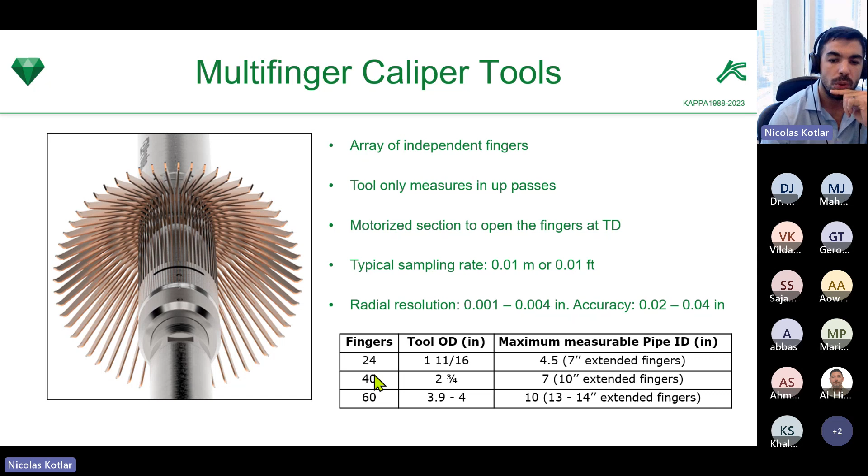The number of fingers has to do mainly with the pipe diameter to be logged. In this case, the example that we will see in this webinar is a 5.5-inch casing, so a 40-finger caliper will be used. Then the finger response itself: what we want to measure are these changes in internal radius, either a hole, a penetration, some metal loss due to corrosion, erosion, or the other way around, deposition.

For that, each finger is connected with an actuator, and this actuator will move in and out of a system of coils, a displacement transducer, and this will allow us, through some surface calibration, to quantify the radius and the radius variation as the tool records the up pass.

So multi-finger caliper is, I would say personally, the star. Let's say it is the bread and butter of the integrity evaluation. And why is that? Remember, compared to other techniques, the multi-finger caliper deals with the first barrier, right? We need to be in touch with the tubing or the casing that we want to analyze.

And this is important because, if you see, there are two studies here. I know that they are a bit old, but this is the published data that I could find. For example, this is from Norway. And if you see all the failures found in Norway, I think these are like 200 wells, something like that, you will see that the main issues occur in the tubing. Right here, you can see the tubing.

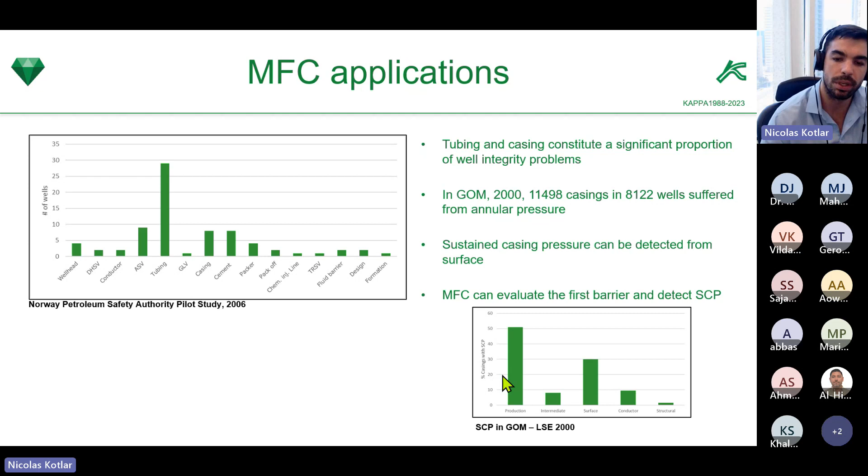So you can imagine that a tool that gets access to that first barrier, either the tubing or the casing, depending on your well completion, will deal with a large percentage of the problems found in wells worldwide. But this is not the only type of problem, leaks that may cause annular pressure. But here you can see the typical problems that could be diagnosed through multi-finger caliper, right?

So in the first case, you can see a tubing that has suffered from corrosion, in this particular case with some fully penetrating holes, right? So definitely, if this is an injector well, the water would not be going to where we expect, or if it's production, of course, this will result in annular pressure, right?

Mechanical failure: in this case, what you see is a casing burst, right? So this is when the hoop stresses are larger than the burst pressure of the casing. Deformation mechanisms: in this case, you can see a 3D image of a helical buckling, right? Compressional stresses or tectonic movements across faults may cause different types of deformation, shear deformation, helical buckling, bends, and so on.

Casing wear, right? Imagine that you set your casing and then re-enter the well to further drill, or for coil tubing or any intervention. The contact forces between the BHA and the drill pipe itself can leave grooves, reducing the mechanical properties of the casing. And also deposition, right? Deposition is another type, calcium carbonate, asphaltenes, and so on. These are all integrity issues that can be diagnosed through multi-finger caliper.

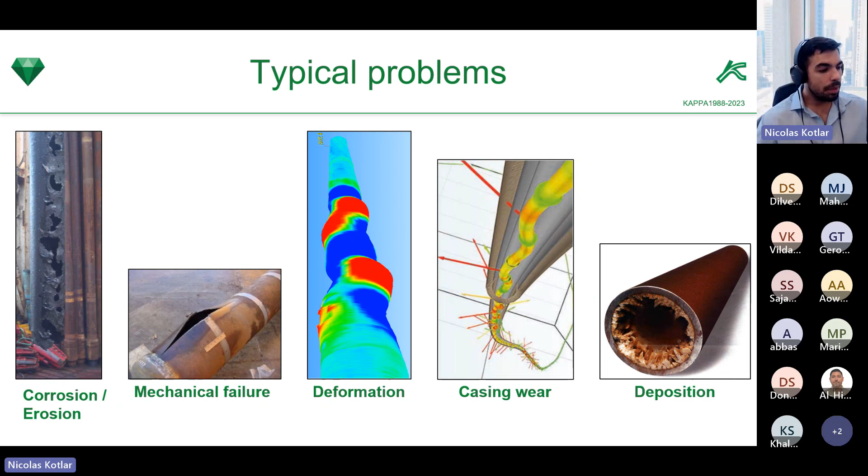So with this quick intro, I will go straight to Emeraude. In Emeraude, we're going to deal with a casing that has a leak, right? And we are going to use two tools to find this leak. So first, we will do it through a multi-finger caliper, and then we will move to the spectral noise data. Before going to spectral noise, I will get back to some theory, right?

So I see someone saying that they cannot see the screen. If you can, please, the rest of you confirm that you can see the screen before I move on, just to avoid any issue. Yeah, for me, I can't see the screen.

Okay. So this is Emeraude. I'm going to start a new file from scratch, and we'll start by creating a survey that I will call MFC main pass, for example. Right? We're going to load some multi-finger caliper data here.

Typically we would like to define as much well information as we have, completion, open hole logs, well diagrams, the more the better, right? But in this case, we're short of time, so let's go straight to load, and we're going to load multi-finger caliper MFC 40. This is an LAS file that typically contains, as you see here, one radius column for each finger, right? And also contains some deviation.

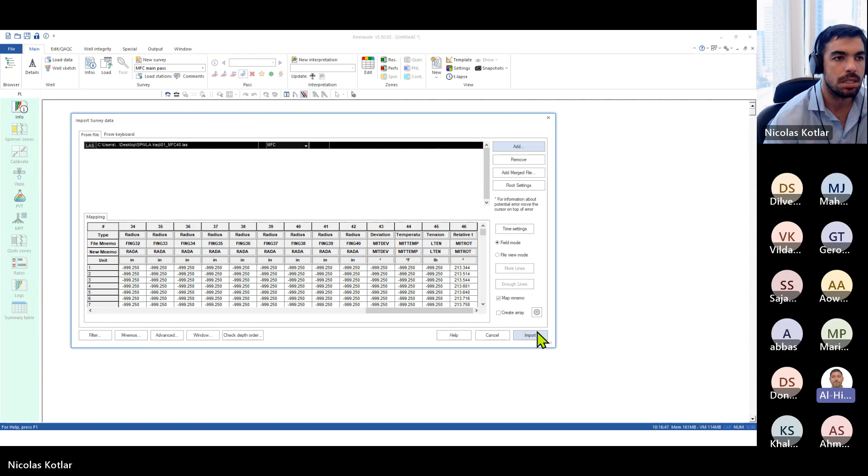The loading became much easier. Before you had to... So first of all, the data in 5.50, the multi-finger caliper data, may be loaded as DLIS, but also before you had to identify some mnemonics. Now it's everything in one go. If you see, I loaded the data and I didn't have to identify anything, so I just click import and everything gets loaded immediately, right? So, there we go.

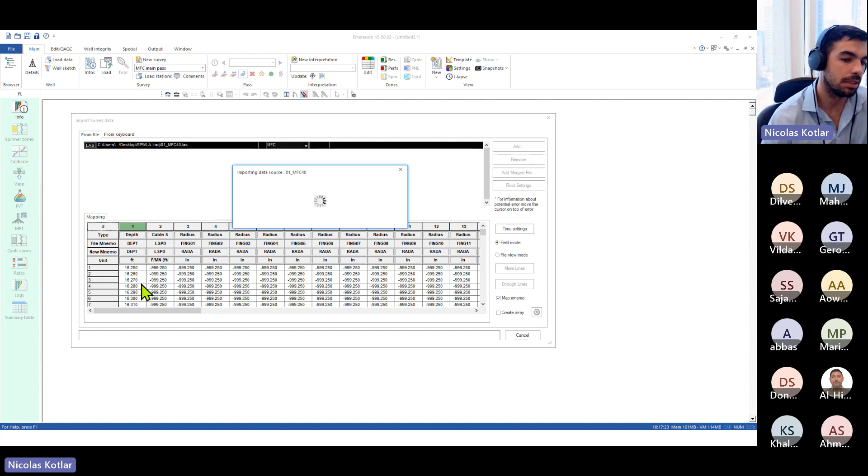So we are loading this data, and as I said, these are big files because the sampling rate is 100 points per foot in this case. So you can see in the background some data has been loaded, and many of the statistics that we are interested in are a function of the nominal diameters, right?

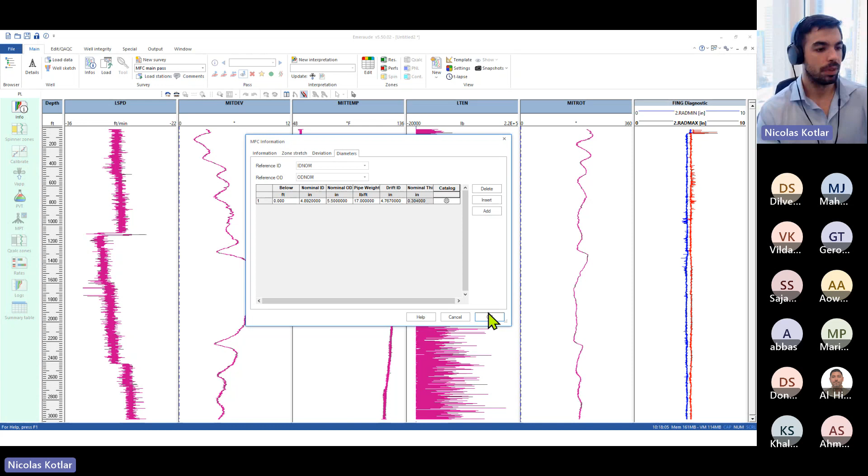So here I go in the multi-finger caliper information, I go to the diameters tab, and from the catalog I will find the pipe size, the casing or tubing size that I'm interested in. In this case, it's a 5.5 inch, 17 pounds per foot. I click OK, and there we go. So as soon as I accept this, you can see that Emeraude will compute a number of statistics, right? So this is all our data loaded.

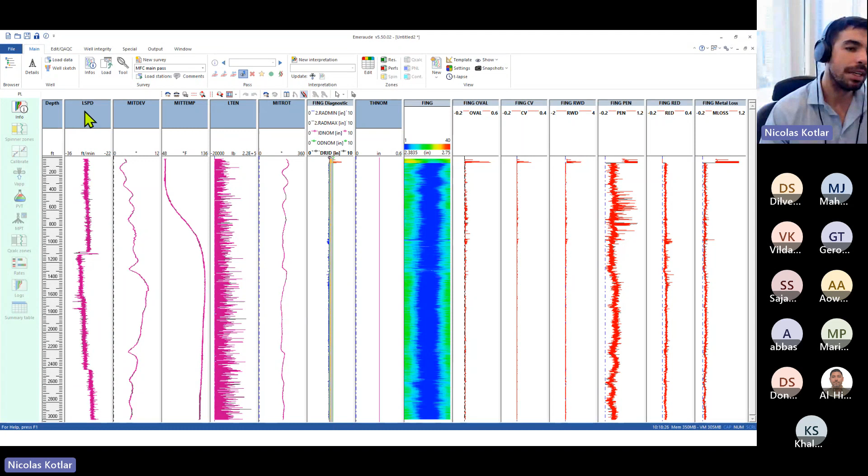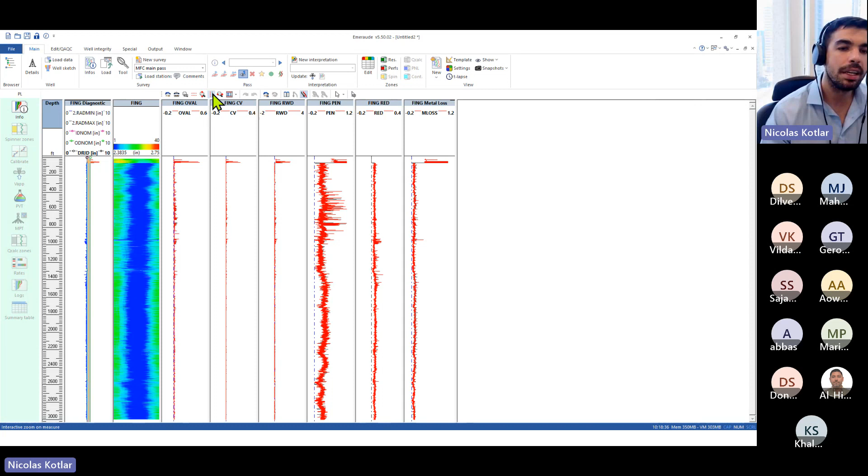And as I said, first of all, let me start from the left. We have cable speed, deviation, and so on that I will remove from this view initially. And then there is the typical unwrapped image of the multi-finger caliper, and then the statistics, ovalization. The well-known ones are penetration here, reduction, metal loss. These are the ones that we are interested in.

Remember that we are looking for a leak in this case. So what we are looking for is a high penetration, 100% penetration, right? That means that we have a fully penetrating hole.

Sorry, Nicolas. Yes. I just want to confirm the screen is sharing for everybody else. Dr. Mohammed, you can see the screen as well? Yes, Mr. Mazen. Everything is okay. Okay. So I believe it's Mr. Ahmed who says he cannot see the screen. I believe something is wrong with his MS Teams or the internet. And we will share the recording for the people that have such technical issues in all cases.

Thank you. Okay, good. So if you see, this is the unwrapped image of the multi-finger caliper. Unwrapped means the center of the image is the low side of the cross section, and the sides of the image are the high side of the cross section, right? And in this case we see blue, so smaller radius on the bottom of the cross section and larger radius on the high side.

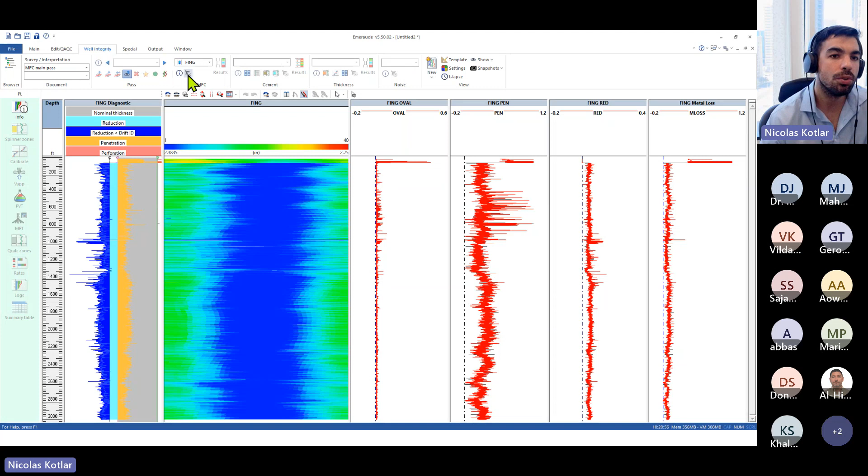So I'm going to go to the well integrity tab. The well integrity tab contains all the multi-finger caliper, cement, thickness, and noise options of Emeraude, and I'm going to launch the multi-finger caliper processing. So this is the processing window, and I'm going to zoom in at a certain depth here with the scroll, click on cross section to show you the cross sections at a certain depth, and add the markers.

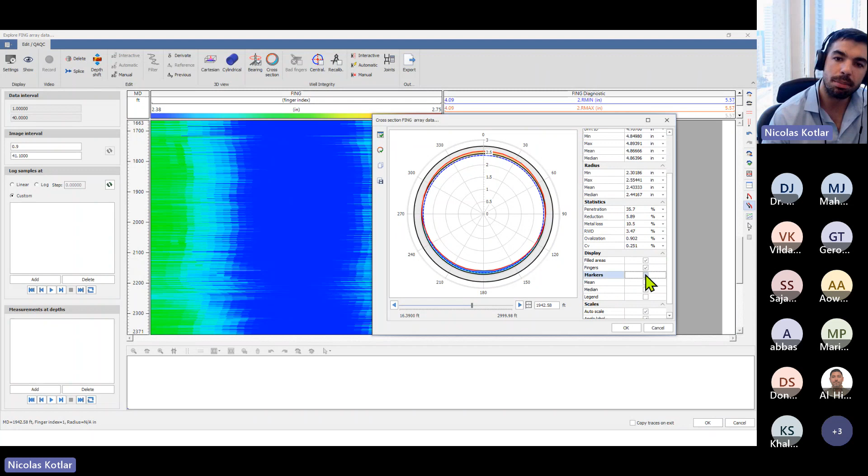The markers here are the positions of the fingers, right? There are 40 fingers. If you hover over a finger, you can see the finger number 18, the angle, and the radius. So compared to the nominal diameters in gray here, the nominal pipe wall, it seems like we have some penetration on the high side and some deposition on the lower side. Actually, let me remove this.

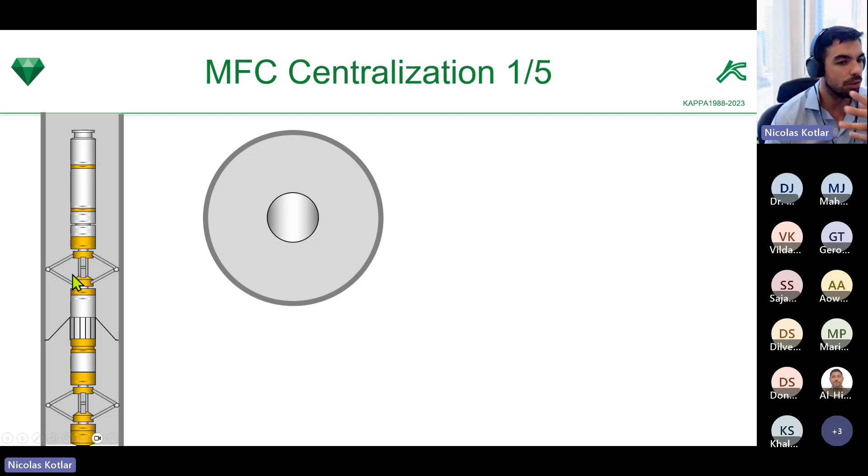So can you see that the multi-finger caliper sees a circular profile, but this is not concentric with the nominal pipe diameters; there is an offset, right? And this is because, let me show you quickly here, if it was a perfectly vertical and centralized well... this is a multi-finger caliper, which is always run with strong centralization, at least 20 or 30, 35 pounds of force, right?

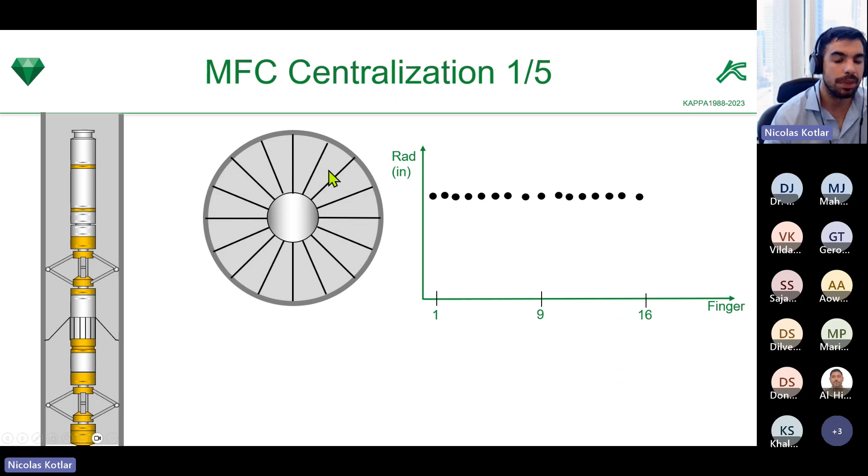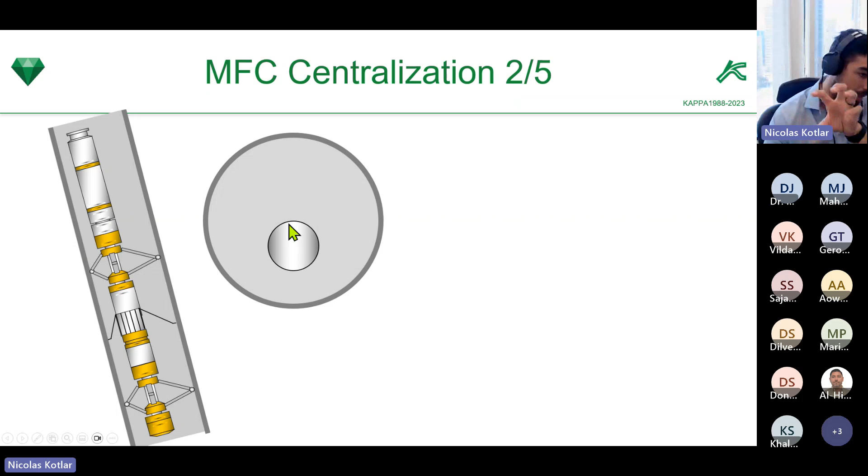In this case, if it's perfectly centralized, the multi-finger caliper should be concentric with the pipe, and therefore all the measurements should be at the same level. But what happens as soon as we have a bit of deviation, due to the MFC and tool string weight, the tool moves down, right? And this is what we see now.

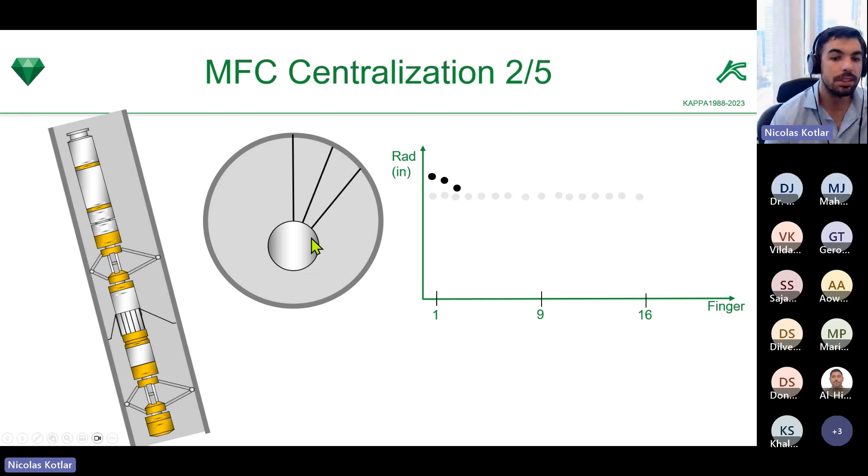So the fingers pointing up show a higher radius than the fingers pointing down, right? So that's why it looks like we have penetration and deposition at the same time. In reality, it's none of that, but it is decentralization, right? So the first thing I'm going to do here is to centralize the data.

What the centralization does is recompute the finger radius after finding the actual center of the pipe, right? So the fingers right now are measured from here, from the center of the MFC, but the center of the pipe is here, right? So what we need to do is recompute the radius based on the actual center. So this is a geometrical algorithm.

I'm going to launch it. I cannot spend much time with this, but later on, if you have questions about the centralization algorithm, please let me know, right? If you see here in the background, it says outliers. Of course, we need to exclude a number of outliers.

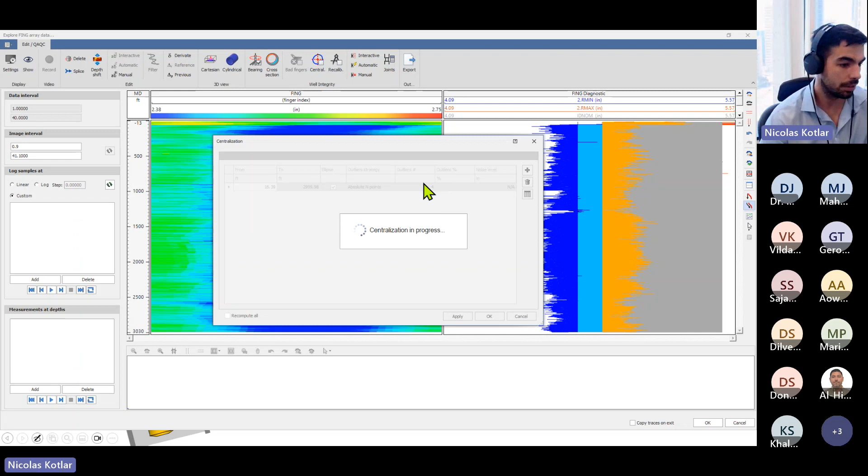If we have penetration or deposition, this will affect the shape of the perfect circle or ellipse that we use. So we remove these outliers from the centralization, and after that we take them into account for the final results, right? So here is the centralized data.

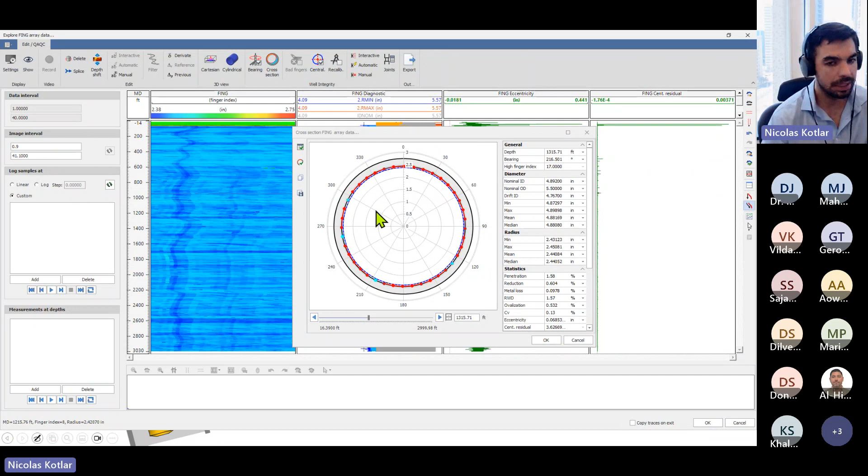If I go back to the cross section here, can you see now that the radius data in red, and some points in blue, which are the ones that were excluded during the centralization, are now pretty much measuring the same radius as the nominal ID. This is basically the data that we are going to use for the final results.

But this is not the end of the story, because can you see here now the centralized data has these bands like this. It looks like spaghetti of darker blue, right? So you may wonder, what is this? Are these actual features of the well, some scratch on the pipe, or some deposition?

The data right now is oriented using a relative bearing device. So first of all, I'm going to uncheck the bearing, and then the map is basically showing finger 1 on the left to finger 40 on the right, right? So now you can see some vertical stripes.

If this occurs, it's telling us that the finger is consistently measuring larger or smaller values from the top of the log interval to the bottom, meaning that there is a problem with the finger itself. It's not a problem with the well. This is related to the initial calibration, meaning that we need to recalibrate the fingers. So here there are some recalibration options, and you can do it interactively as well: recalibrate, interactive.

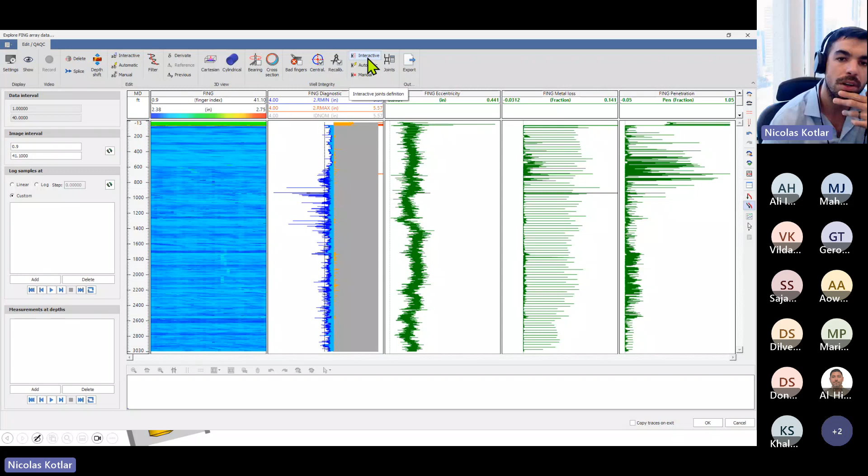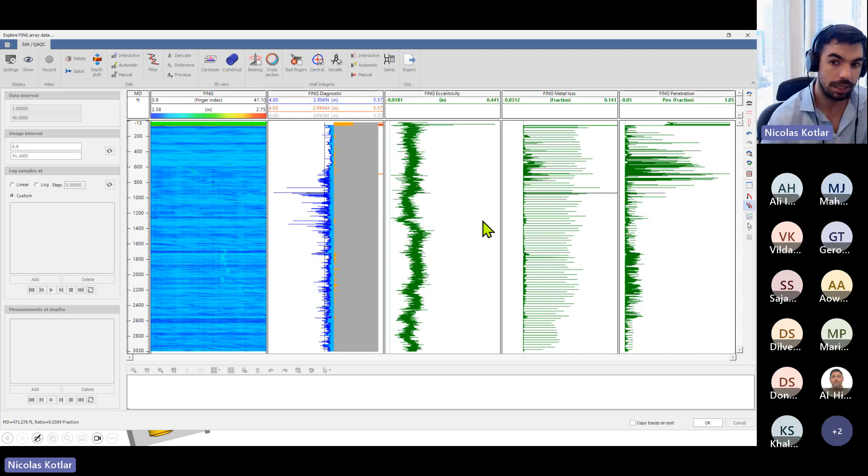Next thing is using this interactive joints definition. I'm going to use, for example, the metal loss track, because I know that these spikes in the metal loss are given by the connections, right? So I click here, it says joints computation in progress, it's identifying the connections and setting joints, right? So here you can see there is a joints track.

Let me zoom in so I show you. Can you see some numbers? This is the casing number in this well, right? And there is some color coding, right? So green means lower than 20% penetration. Some red values here, yellow is between 20 and 40, and so on, right?

So if you see, there are some gaps in the joints definition, right? For example, there is a gap here. And there is a gap there because the line that we set for finding the connections cuts some real metal loss occurring within the casing joint body, right? And Emeraude says, okay, the casing length cannot be that small.

So in cases like this, we can just define this manually. So I click here on manual, and then I say, okay, my casing goes from here to here, right? So here you can see it's coming. There we go. Number 72 now is in red, meaning that this darker red is a penetration larger than 100. So at least 100%. This is a full wall penetration, meaning that, well, if we were looking for a leak,

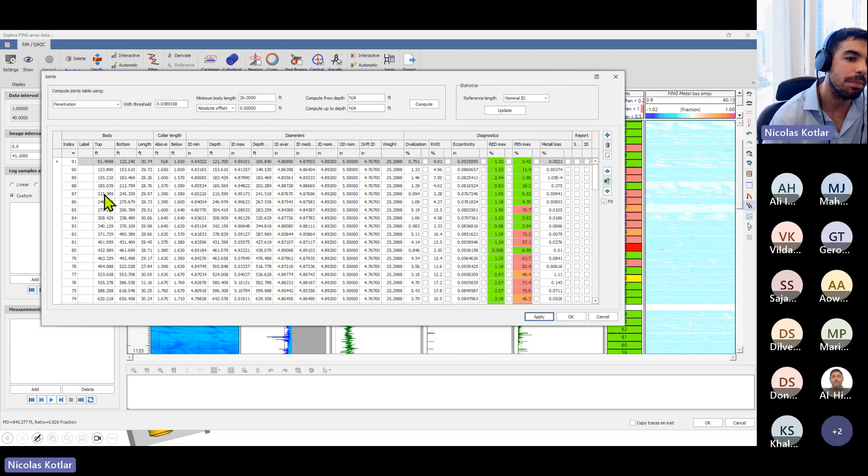If you see index, this is the number of casing identified here during the interpretation, and then the statistics, saying basically where is the top and bottom, the length, and then the internal diameter, average, minimum, maximum, and also the statistics of ovalization, reduction, penetration. And as I said, here we are interested in the penetration, right?

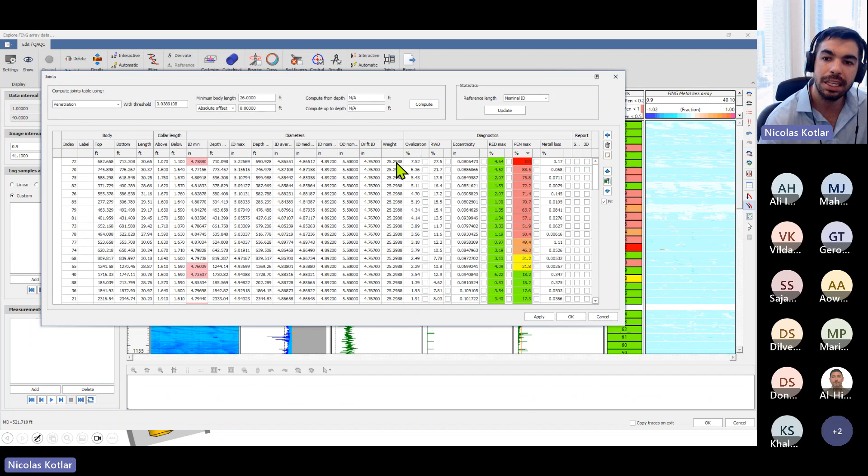So let me, for example, sort this table by descending order, meaning that at the top we will see the 100% penetration. So I can just click here, show this one, right? And in the background, you can see Emeraude goes straight to this joint. Similarly, if I open the cross section, you can see now where this maximum penetration occurs for this joint.

So you can see in this case, the leak in the casing is seen by two fingers, right? The leak is here. Actually, another thing we can do is to see this data in 3D. I'm displaying 3D. In 3D, we can see joint by joint. So here it's organized by casing joint, the joint number 72.

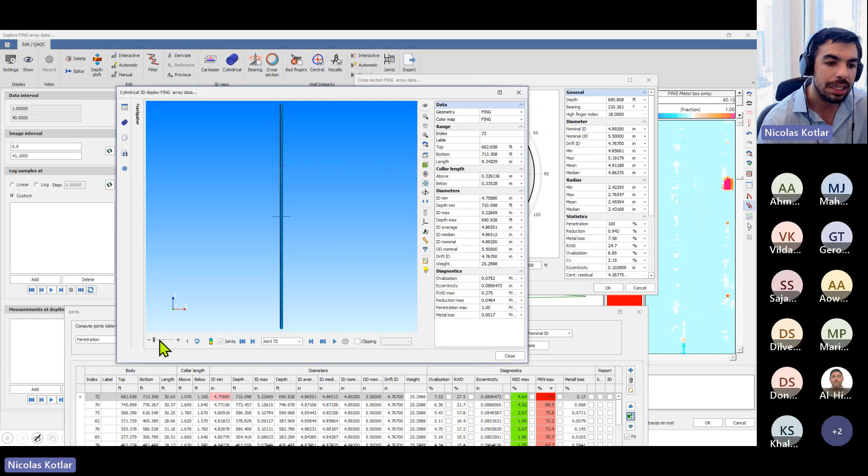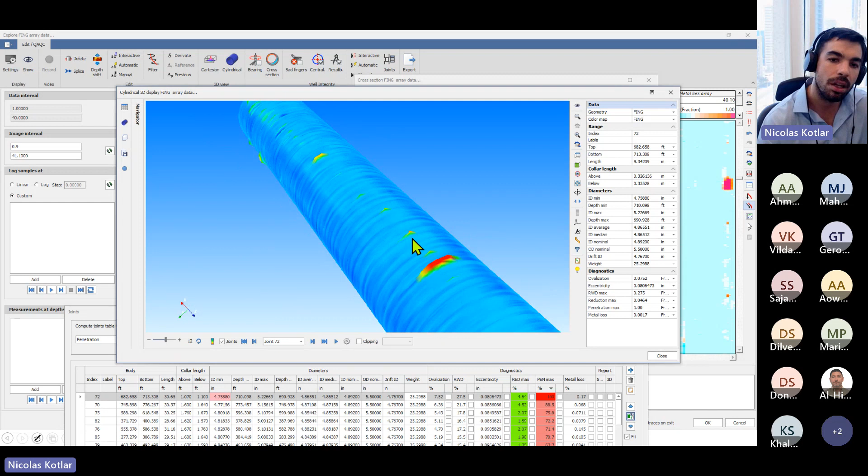For example, let me increase the radius gain like this. And here you can see that this particular joint, so this is the leak, okay? But this particular joint had a number of lower percentage penetrations, right? The only one with 100% is this one, but this joint is affected by penetration, right?

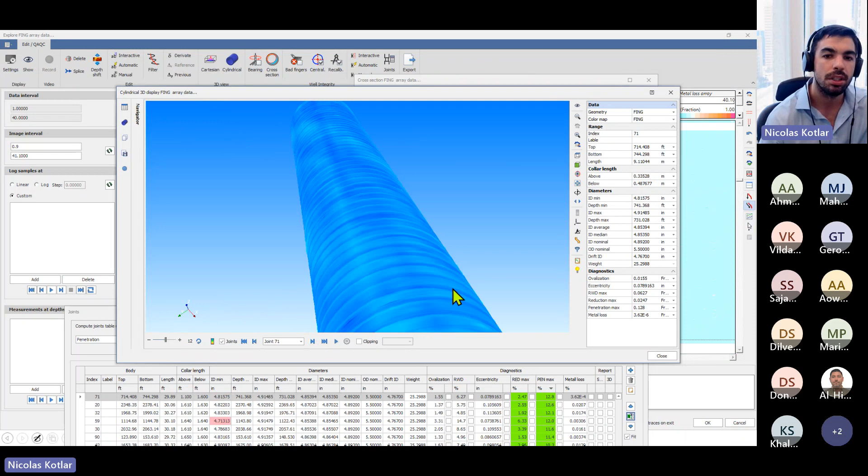So it's possible to toggle like this and see other joints. Some joints may not have anything, so this is joint number 71. So you can see each casing section and visually identify the leaks, right? And this is quite interesting, for example, imagine that you want to take some measure to set a straddle or something, then this is quite useful to do that.

Okay, so using the multi-finger caliper, I think we are now quite certain where the leak is. I'm going to click OK here and go back to the main Emeraude interface.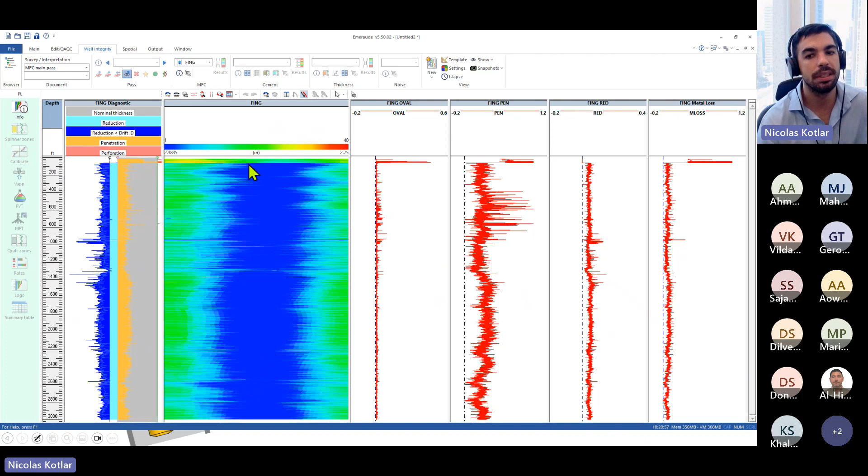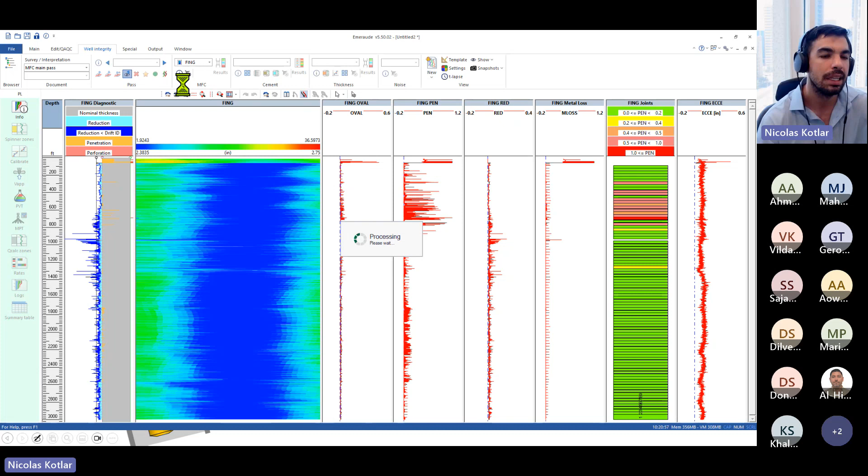And now the data is being processed; we process all of this in the MFC processing of Emeraude. This MFC processing is pretty much a separate window. And now you can see all the results are ported into the main Emeraude interface. So now, at least from the multi-finger caliper side, we have identified where this leak is, right?

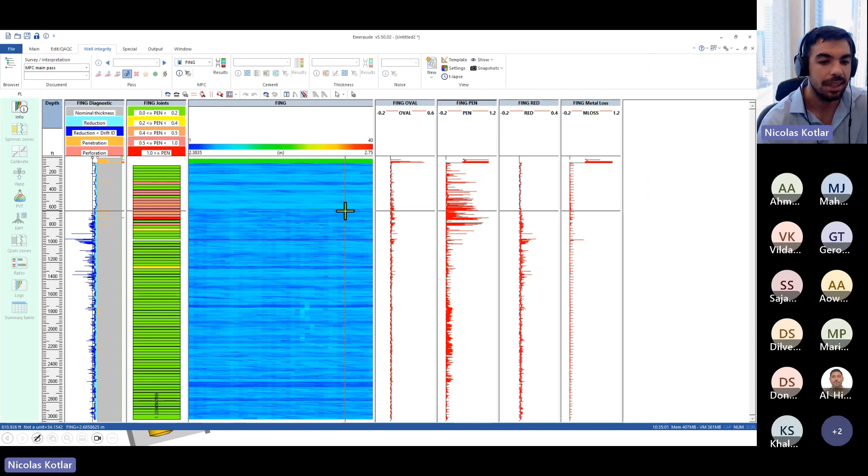But also the objective for this webinar was to see a bit of spectral noise logs. So we are going to load some spectral noise. But first of all, let me give you a quick intro. So what are these tools? What are spectral noise logging tools?

Well, these are passive acoustic tools. Passive in comparison to what we do in cement evaluation, which are active. In cement evaluation, we send a sonic or ultrasonic wave, and we study the signal that bounces back after interacting with the casing, with the formation, with the cement, and so on. This is passive, meaning that we don't send anything. We just hear, right? We are here spying.

Imagine that you want to spy on your neighbor, right? So you put your ear on the wall, don't make any movement, any sound, and then just hear, right? So this is the way you do it. You can do it using one microphone or multiple microphones here.

And these microphones are actually called hydrophones, like a microphone that can measure under the water, right? These are piezoelectric transducers. So the piezoelectric transducer here, one or two, receives a pressure wave. Piezoelectric is capable of transforming a strain, a deformation, into an electric signal.

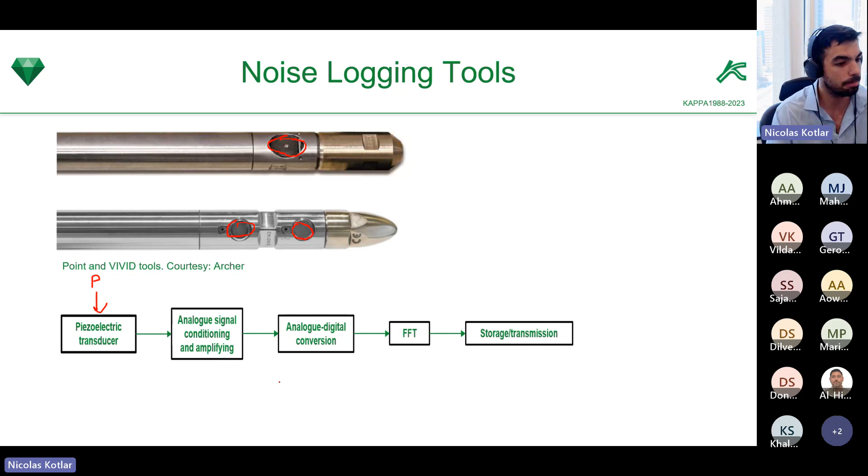The data is conditioned and so on, is moved to the digital domain, and what we will do is a fast Fourier transform, and we're going to move from the time domain to the frequency domain. Here we'll end up with the amplitudes for different frequency extractions. Each frequency is this K, right? So here you can see, again, one or two hydrophones. Sometimes you want to have more than one.

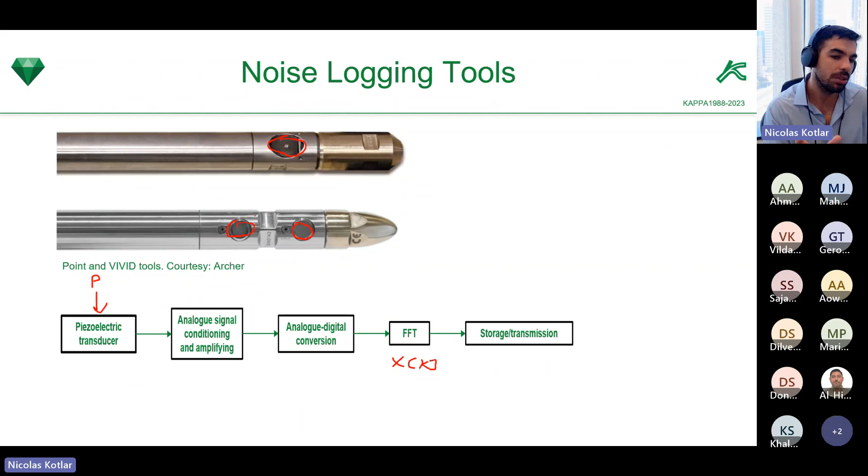Imagine this is the same as a DJ. When you are playing music, you know that you can set gains to the different frequencies. If you want to hear more of the bass frequencies, then you can increase the gain of certain frequencies. Well, having multiple microphones is good for that. So one microphone may have the gains set to handle the low frequency range, and the other one the high frequency range, because in the well there are different sounds.

So this type of tools, for example, here this is a tool string that contains two spectral noise logging tools. And then depending on the objectives, for example, if you are after a leak, you may definitely want to add other tools. So the best friend of the spectral noise logging tools are the temperature measurements. Temperature and noise can see or hear or feel behind the pipe and inside of the pipe. So combining both is a very good option.

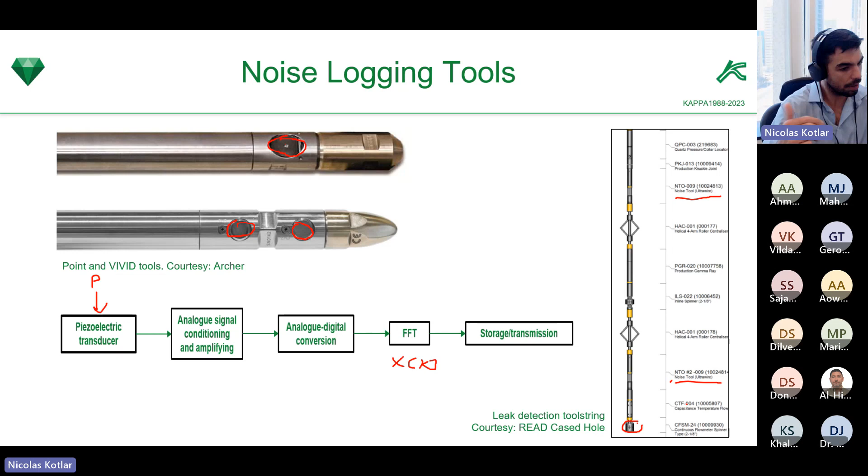Also, flow spinners, flow meters, right? In case you have a leak, the spinner may detect that as well. So how are these measurements made? As I said, if you want to spy on your neighbor, you put the ear on the wall and you don't make any sound. If you put the ear, but then you start scratching the wall, you're not going to hear anything, right? Same happens in the wells.

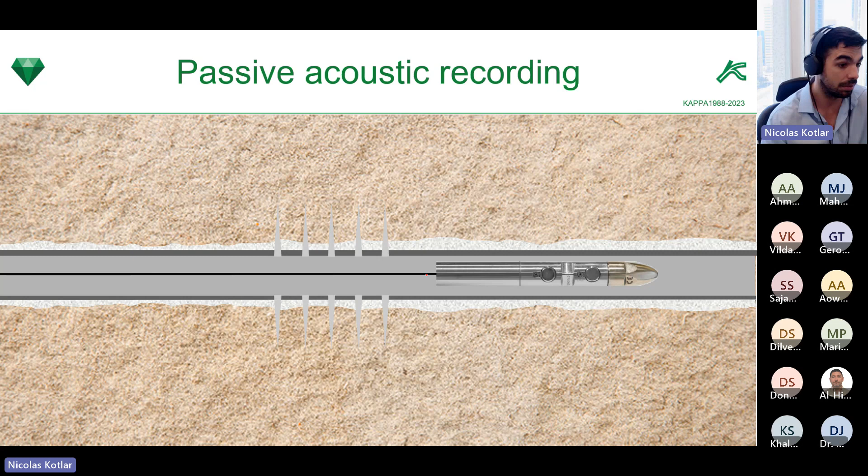Imagine the tool is moving here. The tool seems to be magically floating in the middle of the casing, but this is not what's going to happen. The tool will be on the low side of the pipe, also the cable. So as you move, you can imagine the scratch, the metal-to-metal scratch. So the acoustic wave would be of a high frequency, and it's not going to be characteristic of what's going on inside or behind the pipe due to fluid movement.

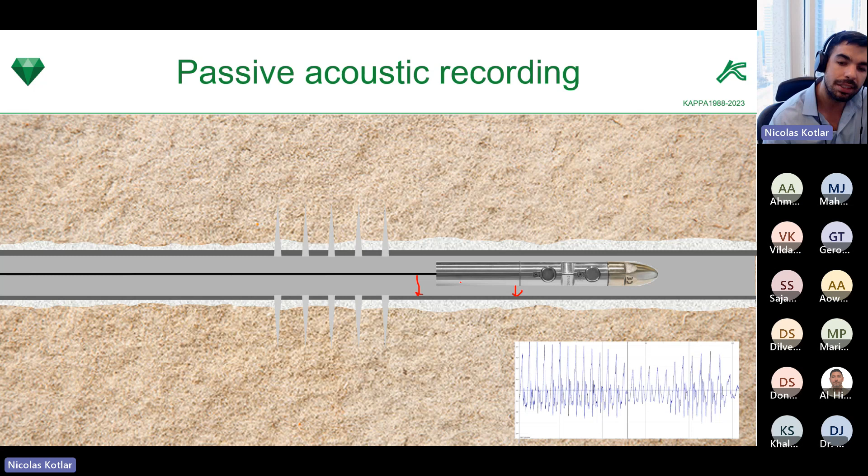But now if you stop and you record a station, you can see that the amplitude decreases compared to here, and also the frequency structure of this noise is completely different. Now if you make a station stop and you listen, you can hear what's going on inside and behind the pipe.

So then if you move again, and here you can see periods with tool movement, stations, tool movement again, a station again, right? So you get the point. So in essence, spectral noise logging data is recorded in a number of station stops. So this is a typical program. First, we would run in hole as a continuous down pass.

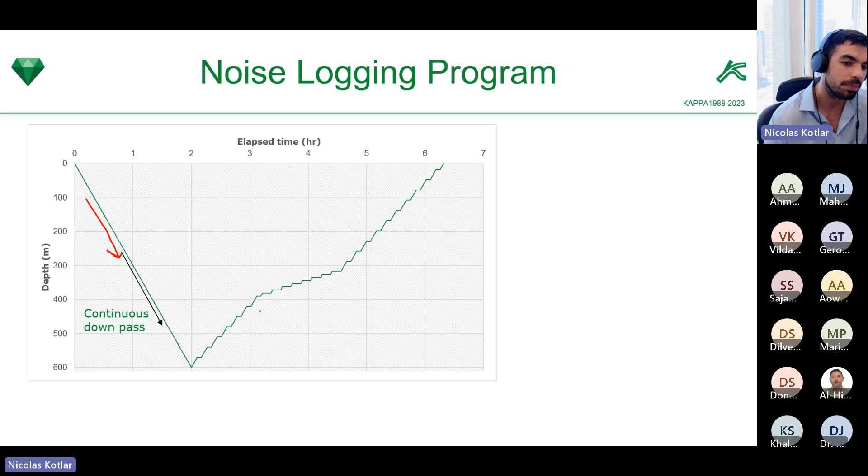This continuous down pass is very good for temperature, for example, to pinpoint where the leak can be. You can record the noise as you go down if you want, but the down pass you can use to actually record the temperature. That's a better strategy.

And then as you go up, you move the tool and record, for example, a 30-second or 1-minute station, depending on the objectives, and then you move another 3, 4, 5 meters and record another station. So finally, the file may be composed of hundreds of stations, right? And something that Emeraude allows you to do is to go from these hundreds of stations.

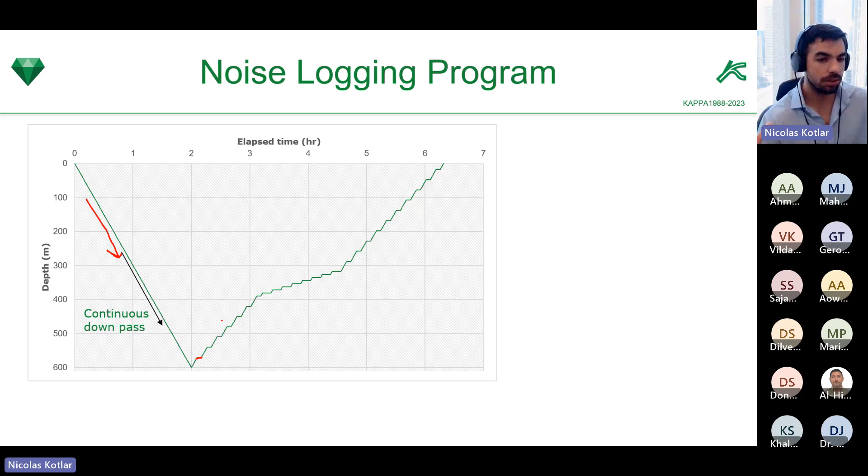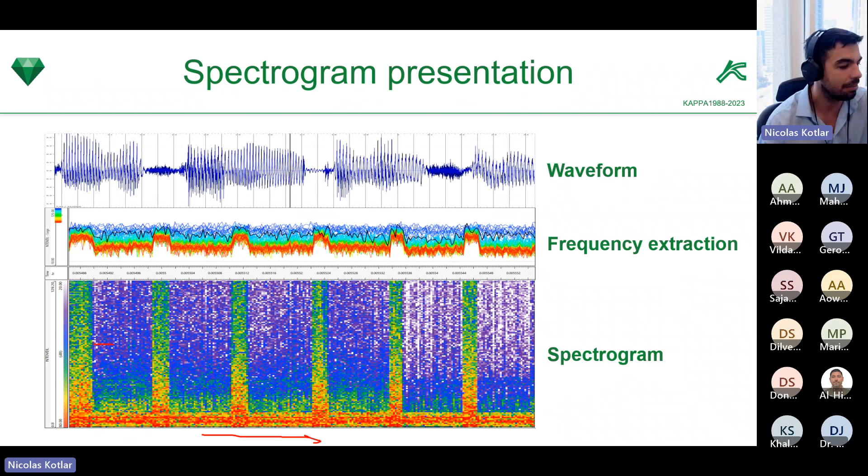Let me show you the next image here, the spectral data versus time. In the horizontal, this is the time scale. Emeraude will allow you to go from this versus time to the versus depth data. In this webinar, we are not going to do it because I need to finish in a few minutes. So what I'm going to do is just load a processed versus depth spectrogram, right?

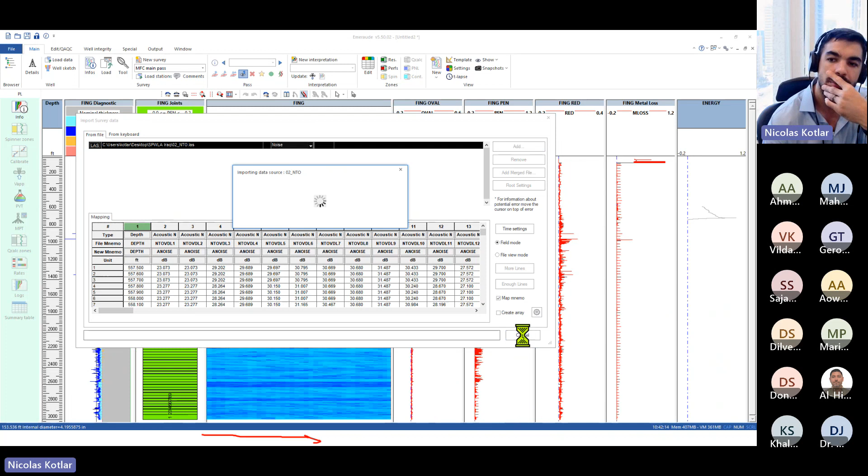So I'm coming here to main and load, click on add, and then I'm going to load this NTO tool from Sondex. This tool goes up to 12.8 kilohertz. As soon as I load it, the data is identified as noise because it contains a depth and a number of spectral channels, 128 channels in this case. And I'm going to import this. And there we go.

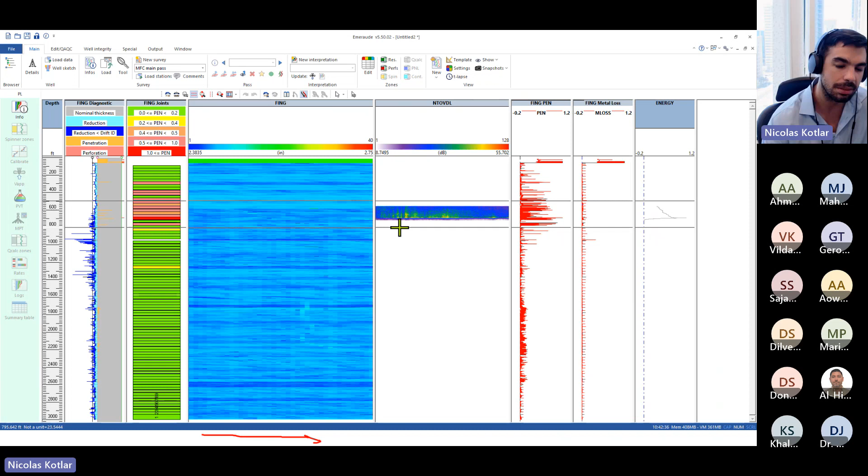Here you can see where the noise is. Let me just remove some of this data and put it here. The noise data was not recorded for the whole well; it seems the noise data was recorded only after the MFC, or maybe the temperature, had pinpointed where the leak may be, right? So let me just modify the color scale, let's say from 25 to 45 decibels. There we go.

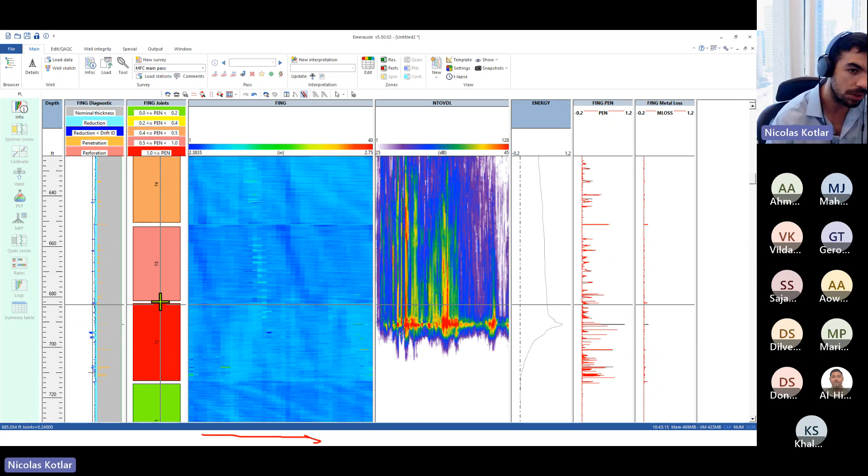The noise data, and let me zoom in a bit more so you can see. Remember, this is joint 72. The casing joint 72 is the one with the leak. You can see based on the color scale the leak was here, and this is where the noise is occurring, right? Emeraude also computes the energy. This is the normalized energy, and the peak energy is occurring at the level of the leak, right?

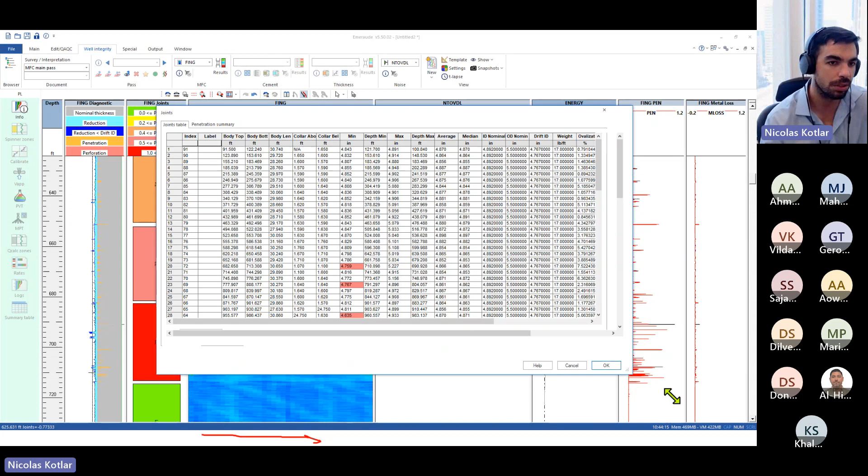So in this case we have an integrated analysis based on noise data and multi-finger caliper, both pointing towards the same depth for leak detection. This is all complemented by tables: apart from the 2D or 3D visualization and the cross sections I showed you, you can find the results tabulated so you can quickly see where your 100% penetration is. You can see the penetration summary based on a histogram with number of casing joints versus penetration level, so you can quickly assess the general well condition based on these statistics, right?

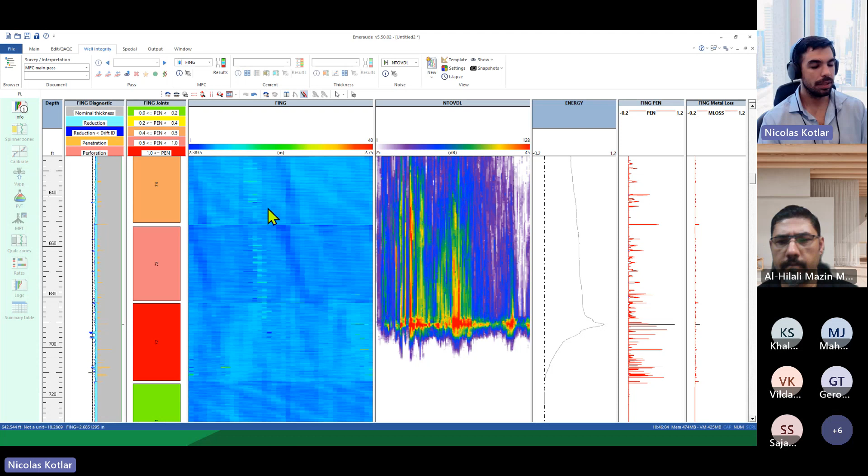Good point. So in Emeraude there are different options because, as you correctly said, the manufacturer has a nominal thickness. We know the ID and the OD nominal values, and from that we can calculate. So here, when you go to joints, you can see the different options, right?

By default, the statistics are based on the nominal ID, right? Then from the catalog, you pick the 7-inch casing, 29 pounds per foot, then it will say 6.184, right? But then you know that there are thickness variations. The joints, the casings are not all the same, right?

So instead of being based just on the nominal diameters, they can be based on some statistical value across the casing, right? So, for example, you can consider the median ID measured in the casing, and that will be taken as your new reference value.

The other thing you could do is if you have a baseline multi-finger caliper. Let's imagine that you complete the well and run a baseline MFC, and you consider that baseline is with the well in perfect conditions, then that may become your nominal as well. Okay, so those are the options.

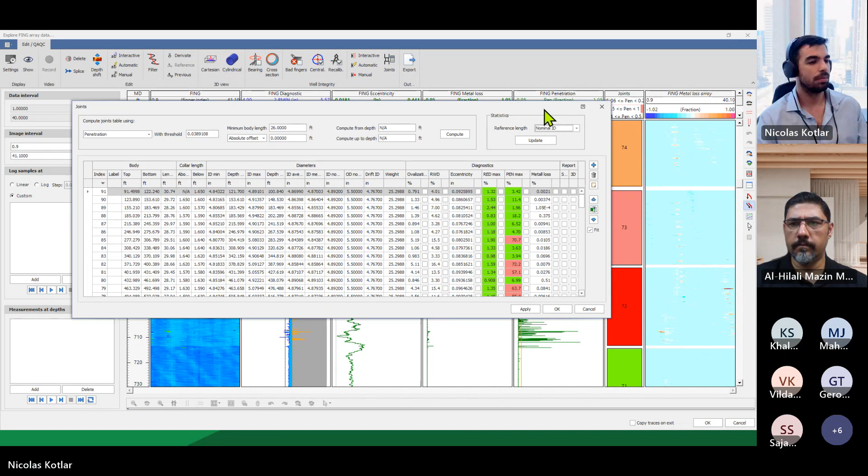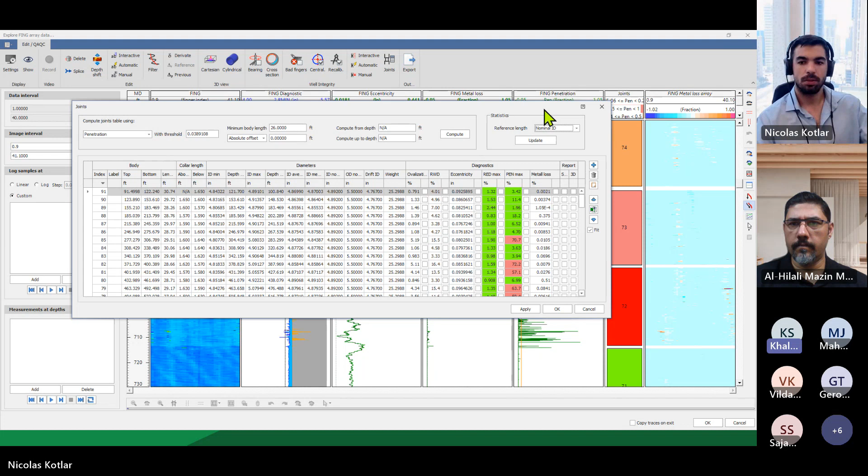Thank you. My second question is regarding the centralization process. I don't understand exactly what you mean by how to exclude points from centralization, and how this approach works? Good point. Okay, so actually, I don't have this

in the slides, but something I could also recommend is to download this book from the Kappa website. The Kappa cased hole logging book is free, right? And then you can go deeper here.

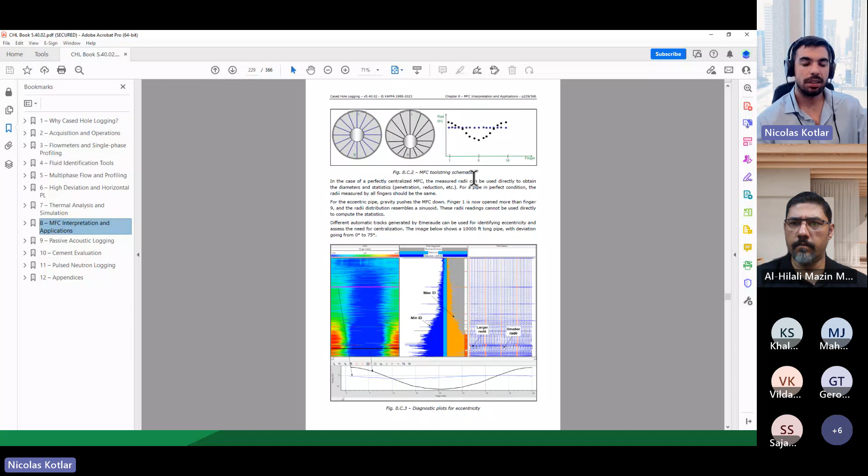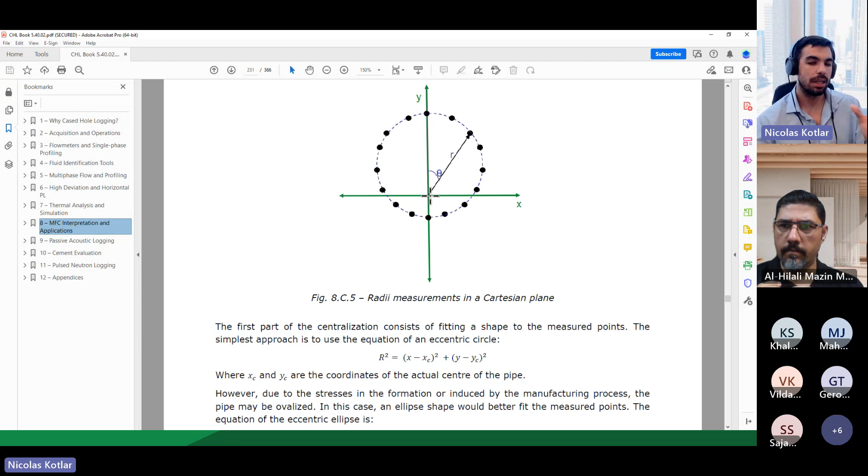In the centralization, basically, the eccentric data is caused because we are measuring from the center of the MFC instead of the center of the pipe, right? So during the centralization, we recalculate the actual center of the pipe for every cross section. And to do that, we fit all the points using a perfect circle or ellipse.

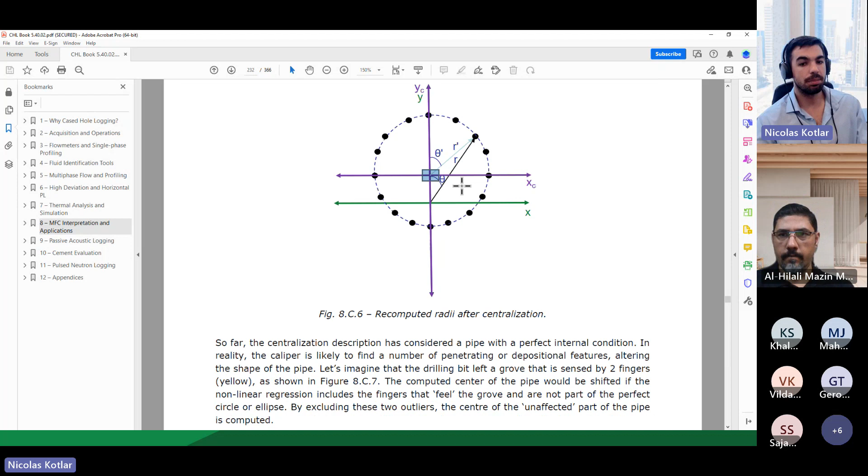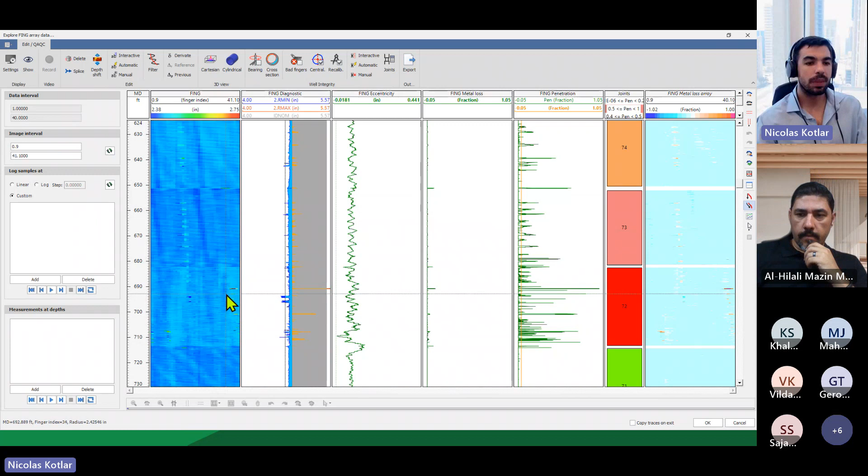So in multi-finger caliper, before centralizing, it's good for you to go through the log. A quick way is to right-click at the depth of this penetration, show values, and you can see this penetration is seen by a number of fingers. This is the radius versus the finger number. It's seen by finger number 35, 36, 37, 38, so at least I should exclude these 4 fingers.

So this is a good option to go through the fingers, the log, and have a quick idea of the size and shape of your defects, right? Fair enough. Thank you.

Yes, I believe Vildan has a question. You can jump in, Vildan. Thank you very much, Mr. Mazin. Vildan, you can unmute yourself. I'm sorry, I was speaking.

Yeah, basically, I don't have a question, I have a comment. Thank you very much, Nicolas. You did a great presentation. I really enjoyed it. Kappa has one of the best and most powerful software. I don't have comments on the software, Emeraude itself, and interpretation. I just have a small comment on MFC application.

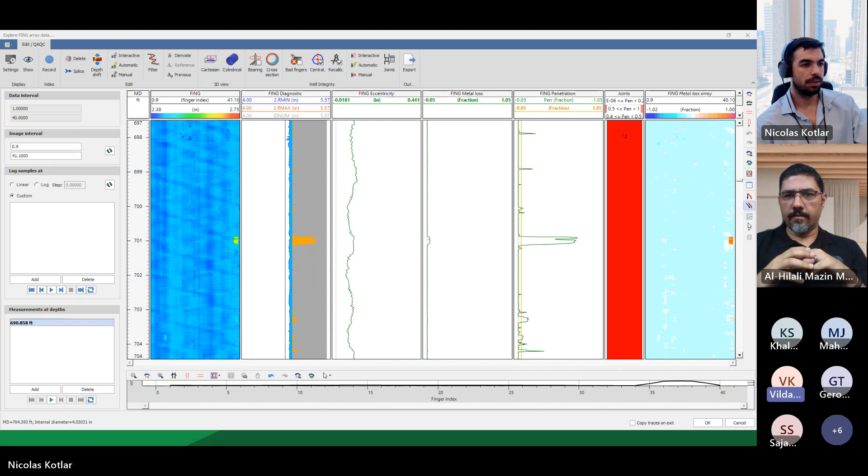Third one is limited azimuthal coverage, because fingers are not covering 100% of your internal surface. And if you run MFC 2 times in the same well, you might get different results, because finger position will be different every time. And the last comment, MFC is quite good for internal corrosion, but external corrosion, unfortunately, you cannot catch. That's it from my side. Thank you. Good. Yeah, I agree. This is also regarding the coverage.

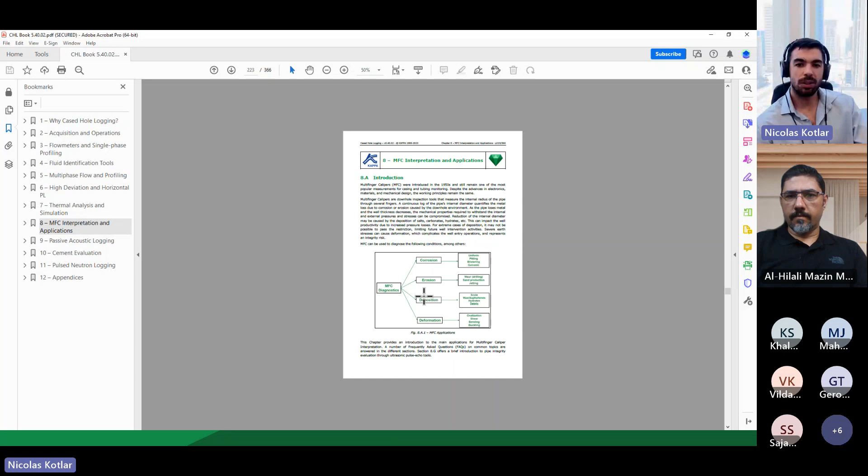Again, I didn't include every single point here, but here in the book that you can download from our website is what is the circumferential resolution of MFC measurements. So for example, in a 7-inch casing, a 40-finger caliper, you only cover like 13%, right? The fingertip is in contact with 13% of the internal surface.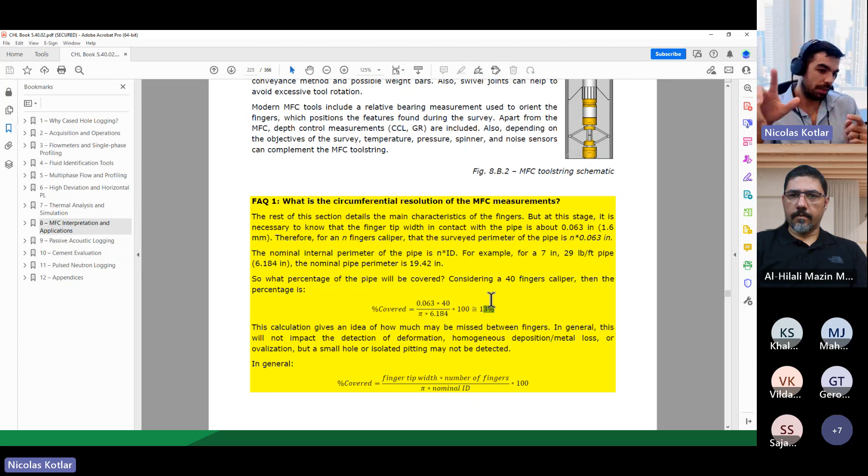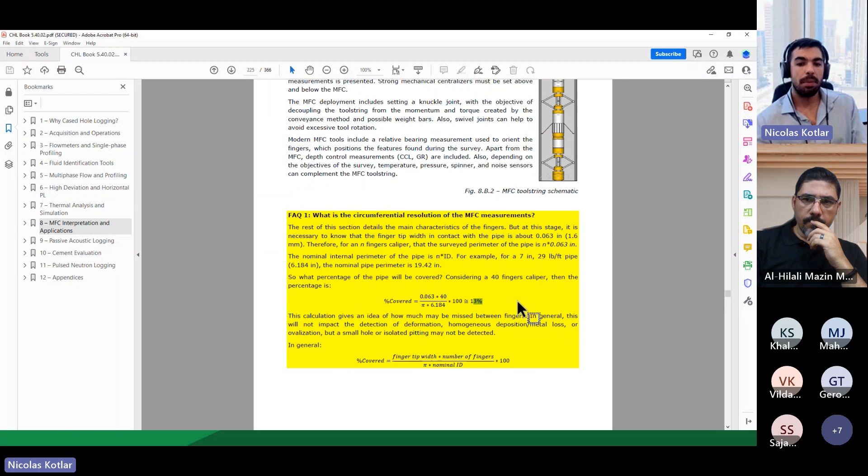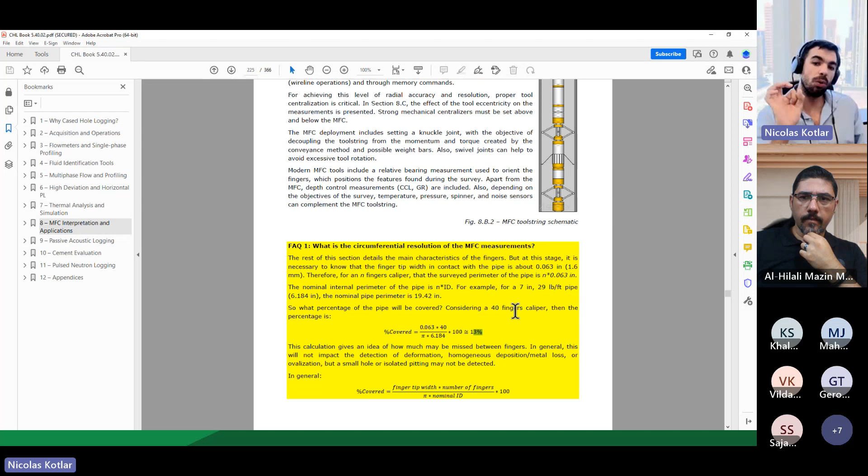So as Vildan mentioned, you are not touching the whole circumference, and you can miss some small holes. They can be missed, right? So you always need to remember that statistically, if you have a homogeneous deposition, homogeneous pitting, you're going to catch it, you're going to get a good sample. But if you have a small hole that falls in between two fingers, you may miss it, right?

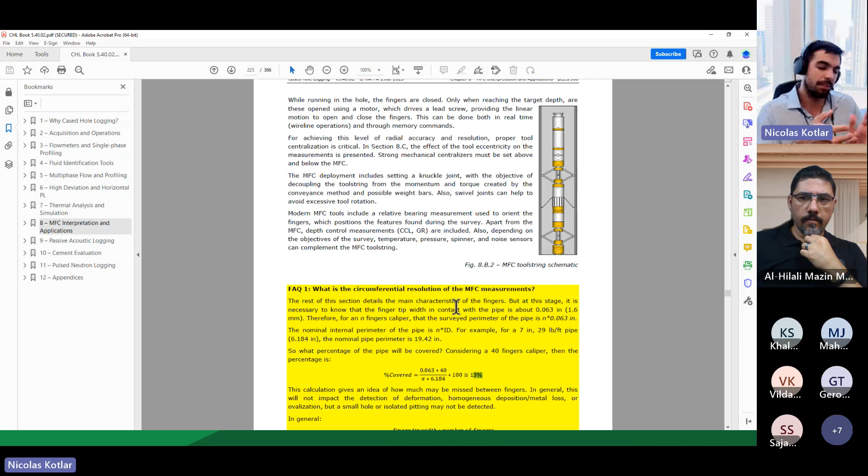Regarding coated casing, coated completions, I've done a few jobs. So one of the fears is the MFC itself scratching the pipe surface. And you need to remember that the contact force of the MFC is only 1 pound-force, so it's barely in touch. So the finger itself, I don't think that's responsible. What I worry the most about is the centralizers, centralization force, or even the cable, or if you have to use coiled tubing. Of course, that puts the completion at risk.

But if it's a vertical well and you can manage it with maybe not a 40-pound-force centralizer, then you are in a better condition, right? So yeah, those are my comments.

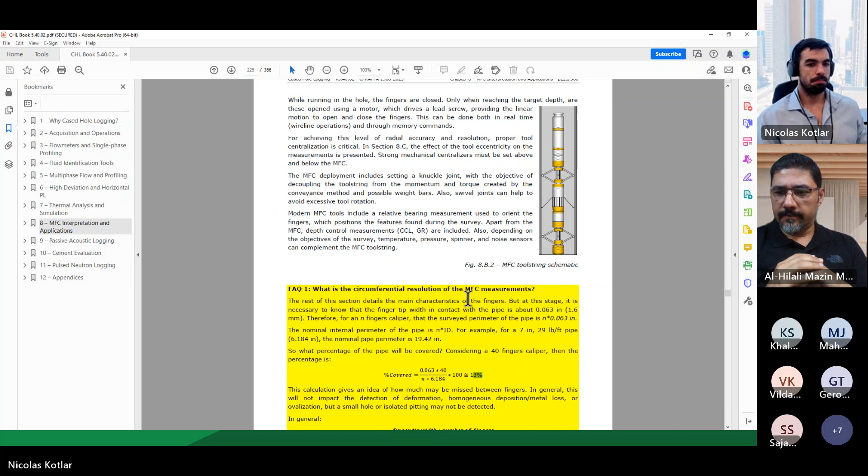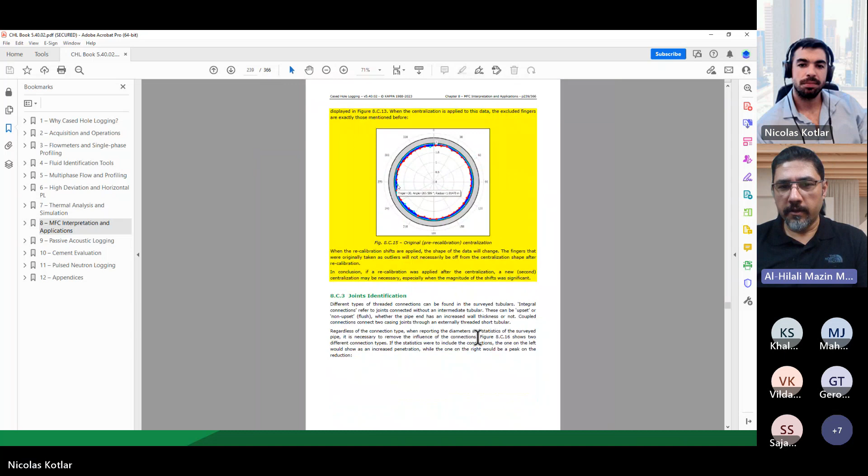I just want to ask, in this document, there is this figure number 8C15. Yes. And there is this point in the conclusion, if a recalibration was applied, then a new second centralization. Can you elaborate a little bit more about this one?

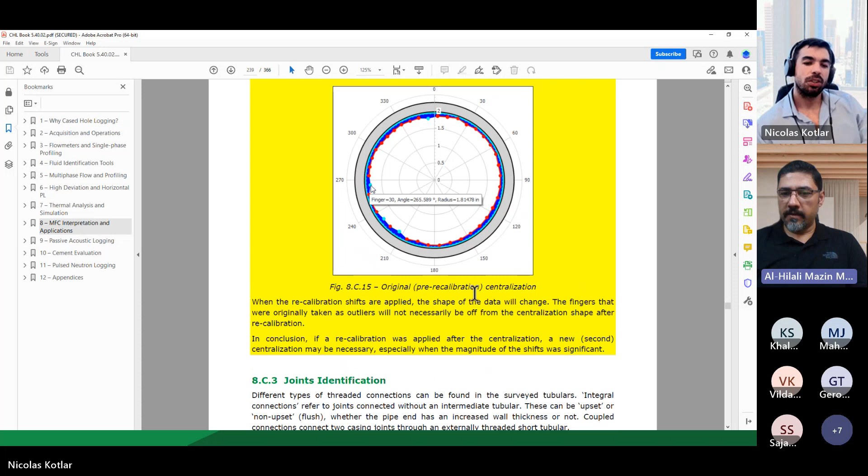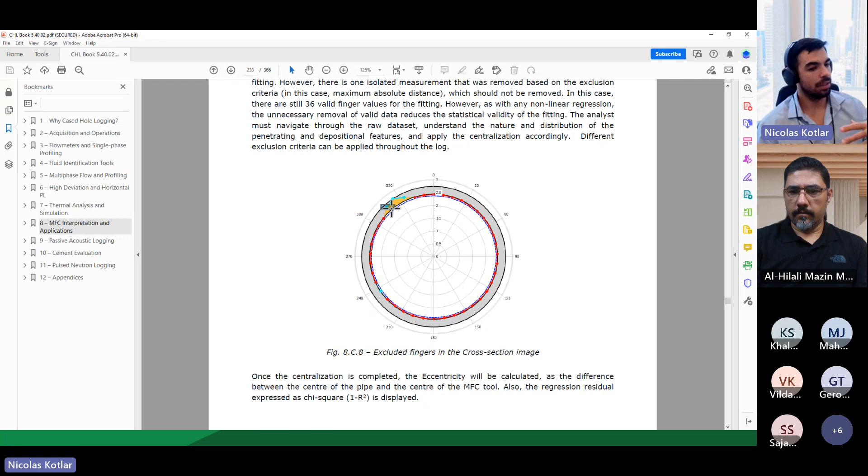Good. So if you remember what we did in this case, first we did the centralization, right? Then after we centralized the data, we realized that some fingers were measuring consistently lower and higher values. So this means we needed recalibration, right? And then we recalibrated, and this is the final data. If we go back to when we centralize the data, we need to exclude some fingers, right? And the fingers that are excluded are typically the fingers that show the maximum or minimum value, that show the actual penetration.

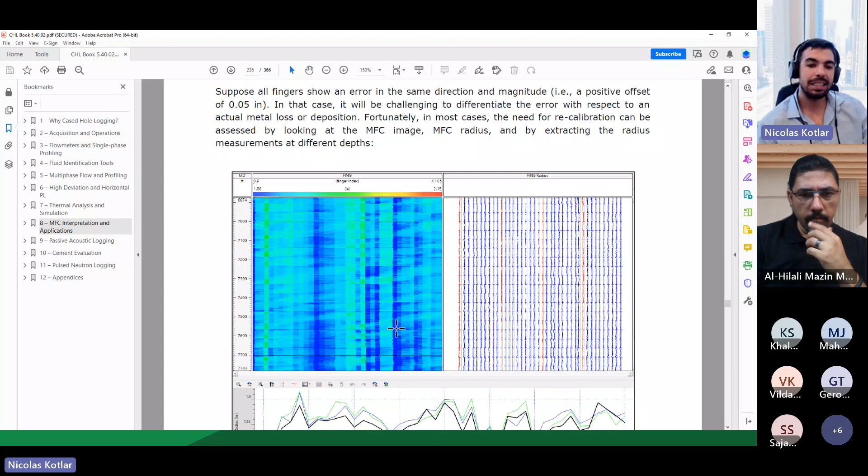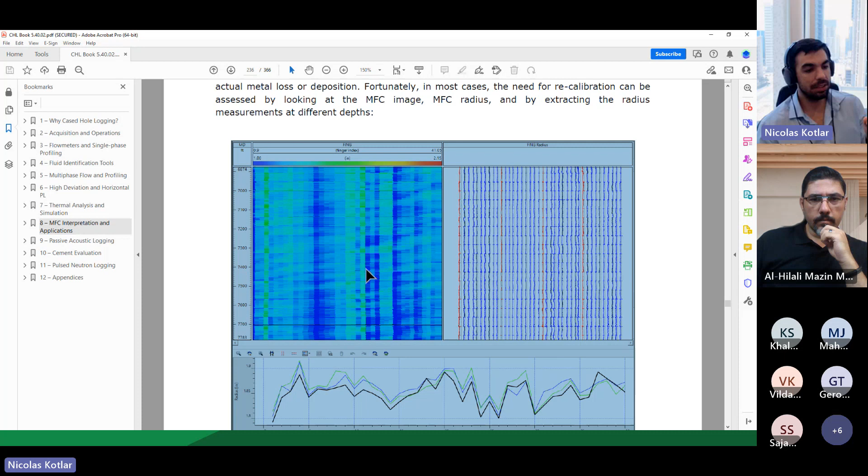But what I mean in that image is that in cases like this, an MFC, for example, with a very bad initial calibration, when the level of stripiness is so big, you see some fingers that consistently measure very large values, very low values. This doesn't talk very well about the calibration, right? And then when you exclude fingers during the centralization process, the fingers that you are automatically excluding may have values that are there just because the initial calibration is very, very bad, right?

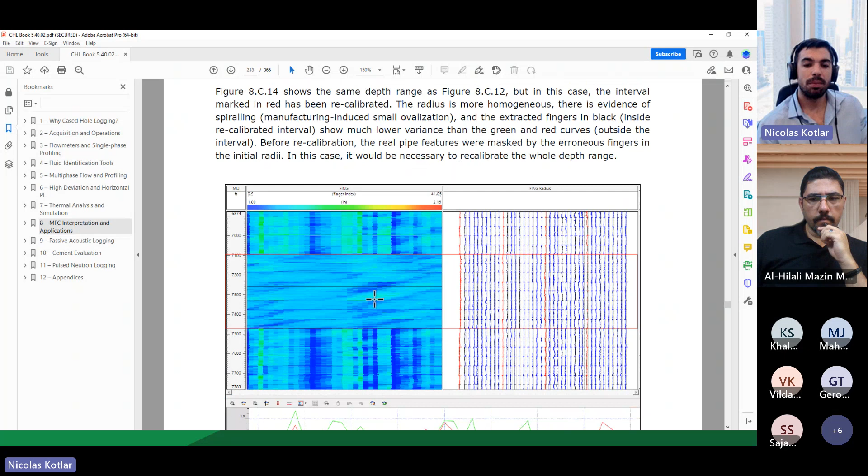So what I mean here is that one option is, first, we would centralize the data, then we will apply the recalibration, right? And then if the recalibration shifts the magnitudes, you come here and see the shifts in inches. If these values are very large, what you can do is go back to the centralization, delete this initial centralization and reapply a new one, right? And the excluded values will already take into account the recalibration that was applied initially.

So this is for cases with very bad initial calibration. You could centralize, recalibrate, and then delete the initial centralization and centralize again. So we need to delete the initial one? Yeah, you delete it, or here at the bottom just recompute all, and this will recompute. So if we recompute all, it will override the previous one? Yes.